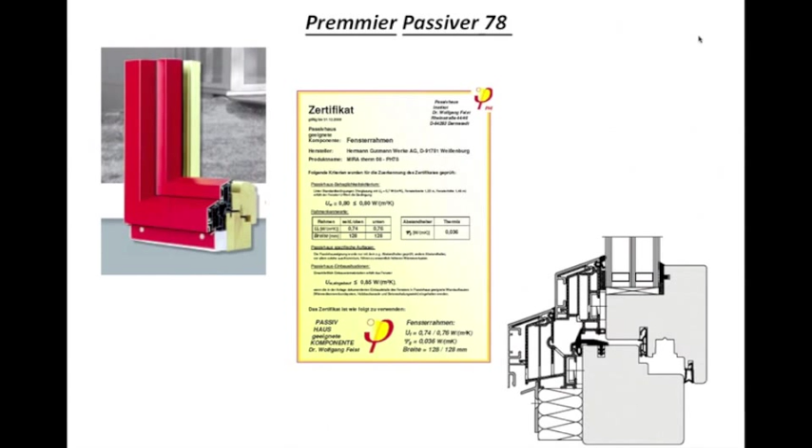Without further ado, I'm pleased to introduce Katrin Klingenberg and her presentation on climate-specific passive house building standards for the context of the North American climate zones. Okay, Katrin, take it away.

Okay, very cool. Let's quickly do a sound check. Can you guys hear me all right? I guess there's no feedback, right? You can type in a message, it should be okay. So if people have a problem hearing me, just type in a message and say it's really bad, speak louder, or something to that effect.

This is a typical building, not very well insulated. The surface temperatures are not anywhere close to equalized. We have radiant losses to the windows, and so on. You're familiar with this. Our goal in a passive house is to basically balance out the internal heat gains with the losses in that particular climate, and from there follow insulation levels specific to that climate.

A couple of years ago, we came across for the first time a provision in the International Energy Conservation Code that made us a little bit astonished, actually. There was a provision that said if you're meeting the peak load of 1 watt per square foot, you don't have to comply with the other requirements of the International Energy Conservation Code. Of course, the inspectors immediately threw it out and said, 'I have no idea why this is in there, you still have to do it,' because nobody could remember where this provision came from.

We started doing some research and found out something very astonishing: this provision has actually been in there since 1975. It was in the very first international code, at that time called the Model Energy Code, as an answer to the oil embargo. Since then, this provision has remained, and that was really amazing.

So at that point, they already understood that if you can build a shell that retards energy loss so much that you can almost heat your house by internal heat gains—meaning light bulbs, people, appliances, or solar—you almost have a balanced home, and you need only very little energy input to keep that building comfortable. Essentially, that's the reasoning why it's still in the International Energy Conservation Code.

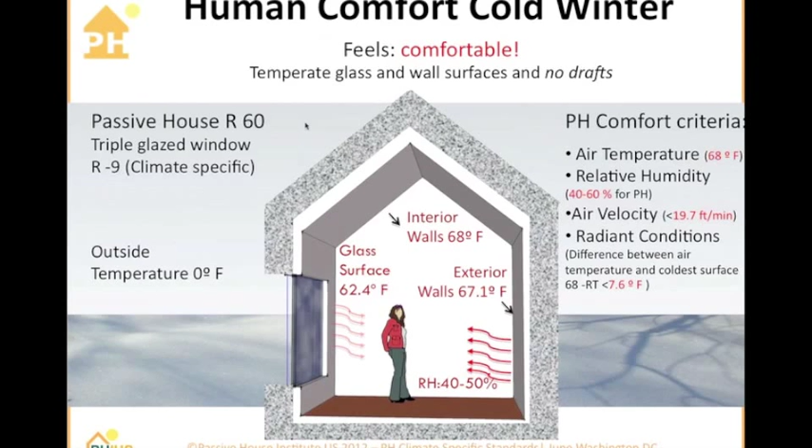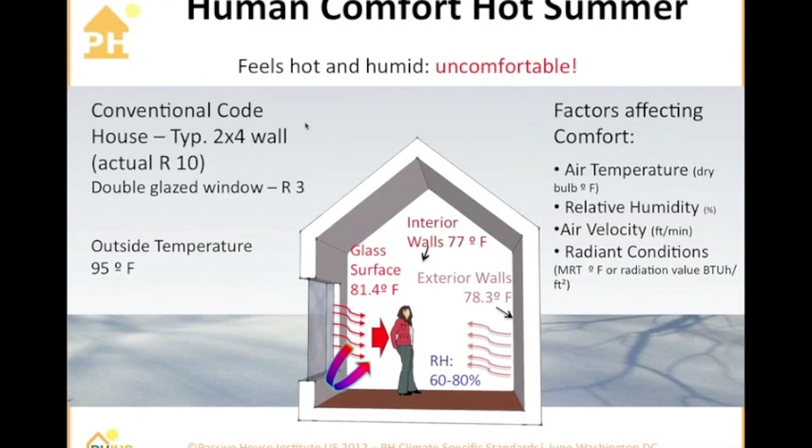So the same principle, of course, in the United States we have to concern ourselves with cooling very quickly. At that point, we have to transfer that same principle of equal in, equal out to the cooling case, which here again in a conventional code home, you can see the surface temperatures are higher, the glazing is radiating heat, and it doesn't take as much R, because we don't have as high a delta T as in a very cold climate.

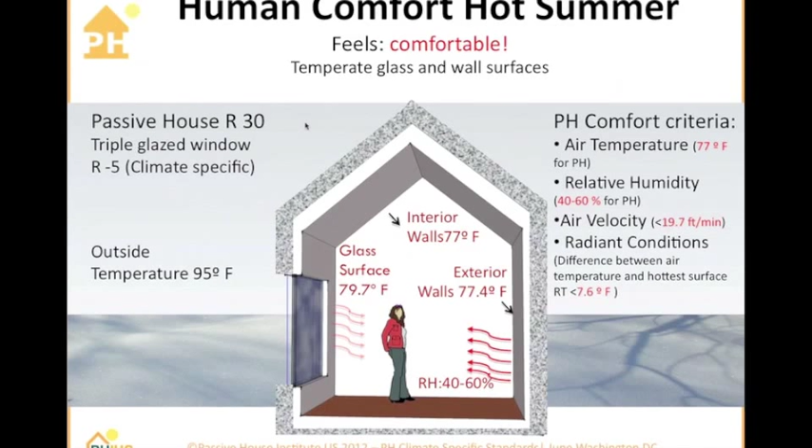So in a cooling climate, we're expecting that insulation is much less of a silver bullet, and there will be very different design criteria that help keep energy down. But essentially here it's the same idea: we're maintaining an interior set point, we're maintaining interior relative humidity. So again, back to this idea, equal in, equal out—we have a stable interior, and through the retardation measures of the envelope, we're maintaining this climate on the inside.

Okay, so from there, very quickly to the current metrics and how this peak load criteria actually plays out in those metrics right now.

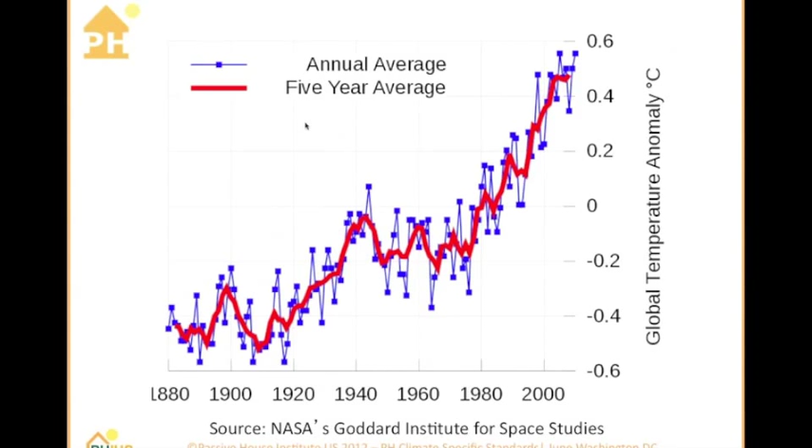Quickly, just thinking back to why those metrics came about, back to the 1992 Rio de Janeiro Earth Summit, the factor 10 reduction request by the scientists back then, global warming, CO2 emissions, you're all familiar with that. This slide right here is still stuck at 0.6. The current temperature is roughly 1 degree Celsius rise in temperature of the planet.

So we really need to get to work and stop those CO2 emissions to have a chance to stabilize this increase of temperature. And some real passive pioneers like Douglas Balcomb right here, he was one of the very first scientists that was starting to work on energy conservation after the oil embargo. He was working at the time at Los Alamos. He was one of the very first ones who tried to come up with something similar to what Passive House is doing now, some kind of design concept to try to manage the complexities of passive, of energy conservation, solar, and a very small auxiliary heating system.

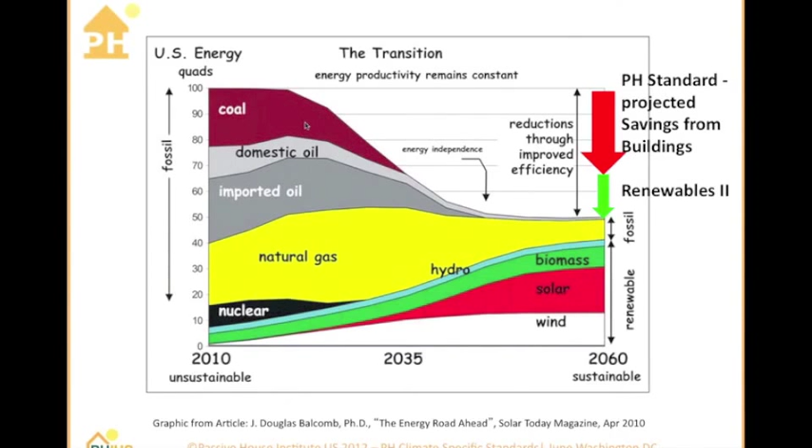He draws a very different map right here than the International Energy Agency still in 2006 proposed, that most of our energy will come from coal and oil and gas and so on and so forth. He very early on already said that most of our energy increase needs to be covered by efficiency and by renewables. And here you go, this is really the ideal of our energy society or economy, how it should develop.

Okay. Ah, okay, sounds good. Where was I? It doesn't matter, just click on that field, it'll come back.

All right, so quickly back to, you all know these slides, the factor 10 reduction. Yes, of course, we are totally behind this. That is where we need to be in our energy conservation efforts. So we're not questioning that at all. That's definitely a really good target where on average we should arrive at.

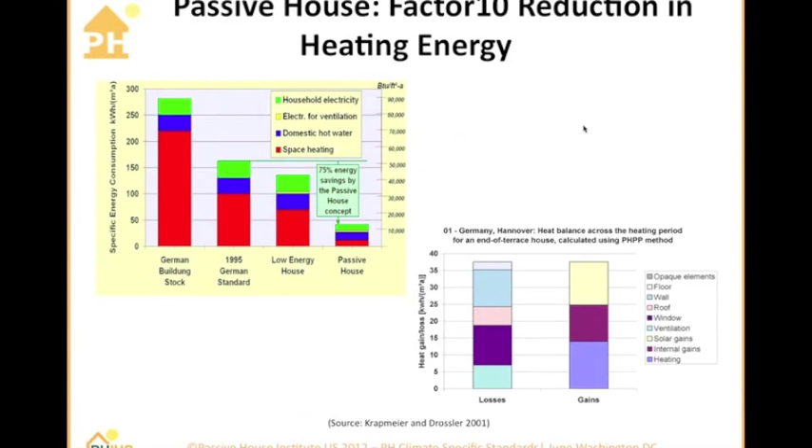And that target is entirely possible in climate zones that are very similar to the European heating-dominated climate. So here's the PHIUS Plus certified Black Beaulieu home in Salem, Oregon, and I'm showing you this right here because for this one we have pretty good monitoring data. And here in this slide, you can see that even in a little bit milder climate of Oregon, we are achieving, compared to a code home from 2008, still about a 66% reduction.

And the match of PHPP with that actual consumption was pretty good, except one thing you might notice right here, that the heating is almost non-existent. And that was already a little bit of a question mark that was raised. That is not how PHPP calculated it. PHPP still calculated a pretty large heating demand on an annual basis.

So what happened here? Well, it turns out what we see in pretty much all passive houses nationwide where we get monitored data from these days, the internal heat gains, people's Xboxes and servers, they are pretty much one-to-one replacements of the kilowatt hours that we otherwise would need for heating. And that might lead to a conclusion that in a culture where we have a lot of internal heat gains, maybe we are over insulating our houses by going to these levels.

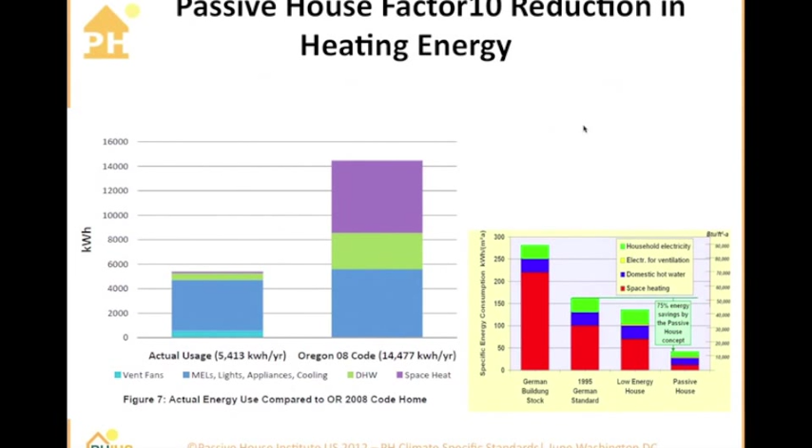Because in this case, in Salem, Oregon, this also had an unintended consequence. In a climate where there should be no cooling load, all of a sudden they caused a cooling load in the summer, which of course also increased the energy consumption. So the projected energy consumption in PHPP was actually a little lower than it turned out in the end.

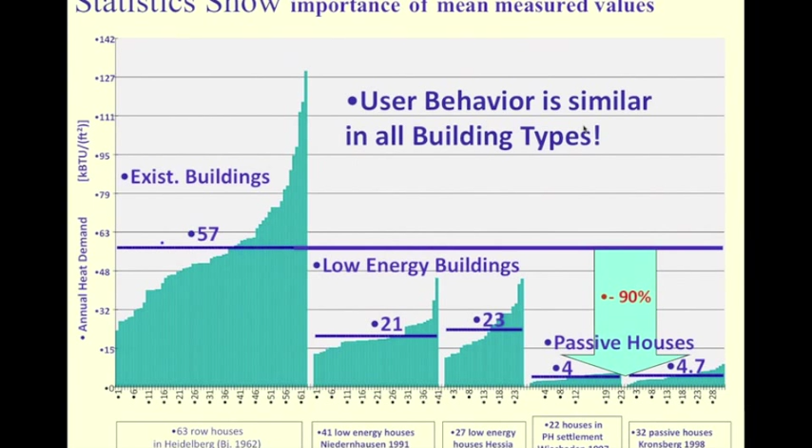And you all remember that slide, of course. This is just the total confirmation that in general, the target with the factor 10 reduction is absolutely right on. If we can get there on average and now transfer that to the United States, allow those in the north maybe a little bit more and tighten it a little bit more in the south, if we still arrive at an energy reduction of roughly a factor 10 or hopefully even a little bit more, then we have achieved our objective from a climate perspective.

Okay, quickly, these are our current certification criteria that we're going by. You all know those. You have probably seen the suggestion from Marc Rosenbaum, and I absolutely and totally agree with him that the annual total primary energy demand, we definitely will have to zoom in our studies on that one a little bit more, because currently the certification is based on the European primary energy factor, which in the newer version even got lowered.

So we are roughly at 3.3 as a factor in the United States on average. And right now, projects being certified using the new PHPP are using 2.6. So that's a little bit, I guess, not very honest with ourselves. And the PHIUS Tech Committee has started the discussion, like, shouldn't we certify based on the actual primary conversion factor

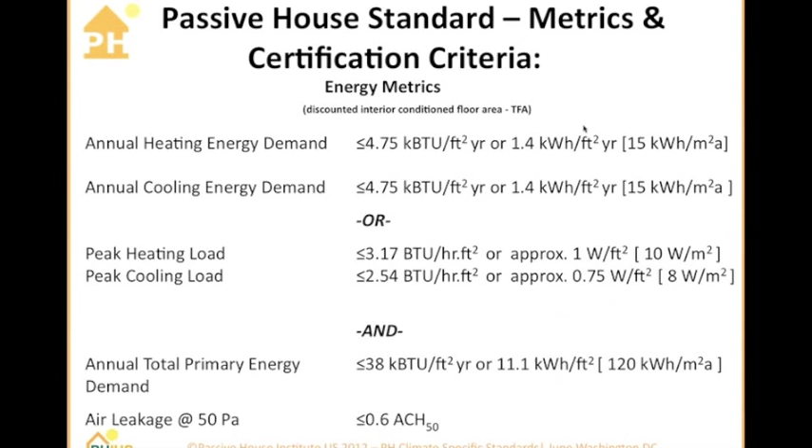that is the average in the United States? Okay, so one little tweak right here, this slide actually, you've probably seen this before too if you've gone through the training. It points to another problem, and that is that currently the certification is based on a treated floor area that does not really match with any of the other modeling tools in the United States or other rating systems, for example the treated floor area that RESNET is going by. And that causes a lot of confusion. People don't really understand that difference. And the treated floor area as used in PHPP is based on German tax law. It really has nothing to do with thermal transfer.

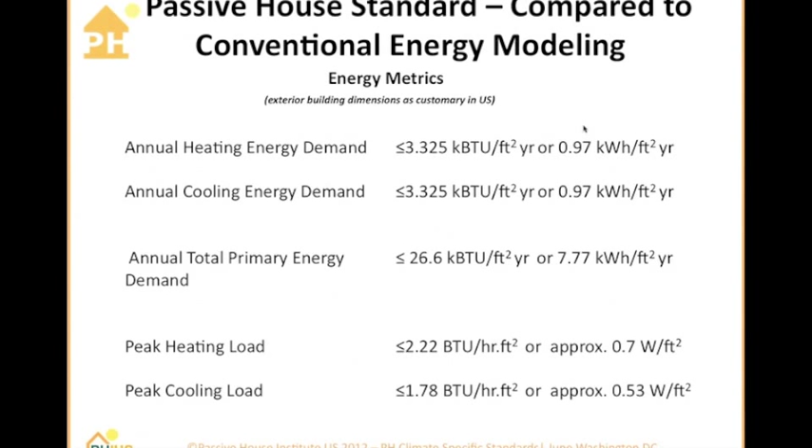So if one really wanted to customize for North America, for the systems in North America, one might have to think about whether we should use a typically used treated floor area, or conditioned floor area, to avoid this confusion. This is, by the way, something similar that Minergie is doing in Switzerland. That's what they did. They adopted the treated floor area or conditioned floor area that was typically used in their customary modeling tools.

Another, you remember this slide right here. Again, this is just to make the case that conservation really is the cheapest way to abate CO2, and that is really our main goal with a standard that we hope to tighten on average by being more granular in our definition for the various climate zones.

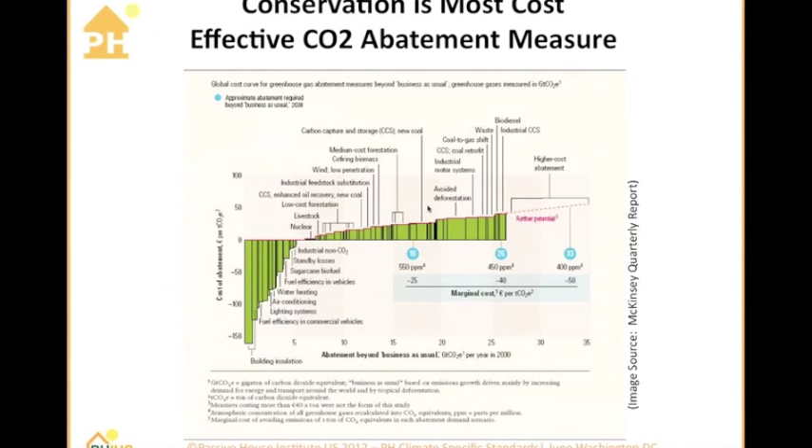You remember this slide, I'm sure, and I like to point out that this indeed is very specific to Germany. There was something very interesting happening at this international conference in Hanover when I was there, and that was Dr. Feist presenting the same curve, pretty much adapted for different climates. And yes, you guessed right. In his curve, even Mexico City showed a drop at 15 in terms of the savings that come from the heating system, which really is very unlikely in a country that is already using the delivery of space conditioning through the supply air. So there are a lot of boundary conditions for different climates that need to get reevaluated and really scientifically underpinned.

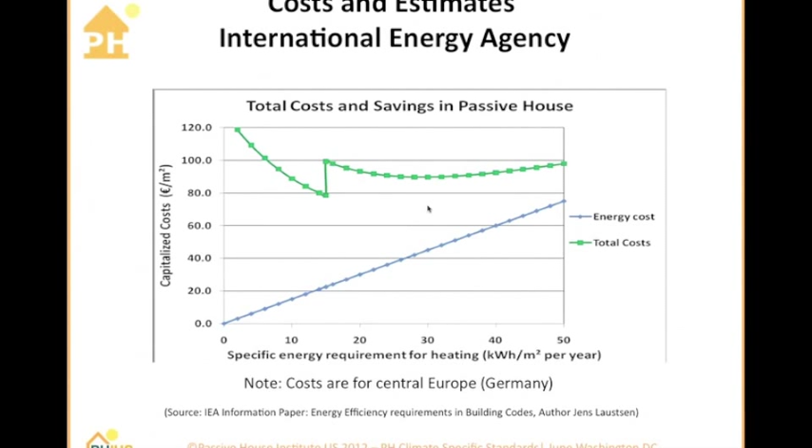We need to make sure that we have the right data and show that this philosophy of passive house, combining conservation with the most cost-effective way to do so, is actually true in the particular climate zone with the particular factors that we can use to lower our overall energy consumption. And you remember this one: in other climates, this curve might not look like this. So this is part of this whole idea that we might want to look at different models for this cost effectiveness that other organizations are actually working on. And we need to give this some thought and see what is up with those.

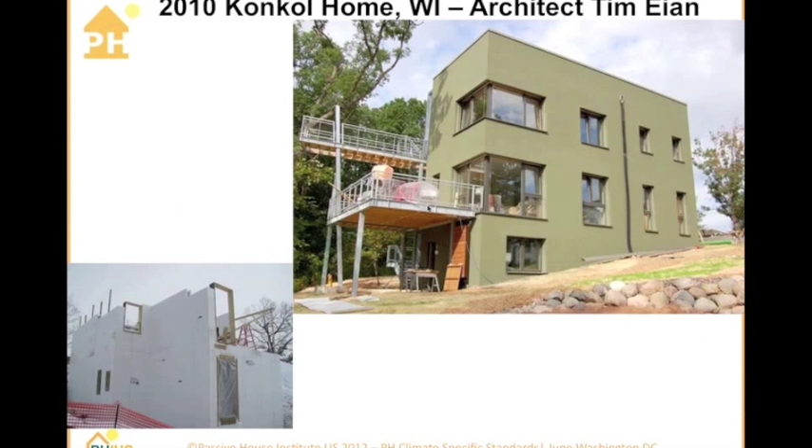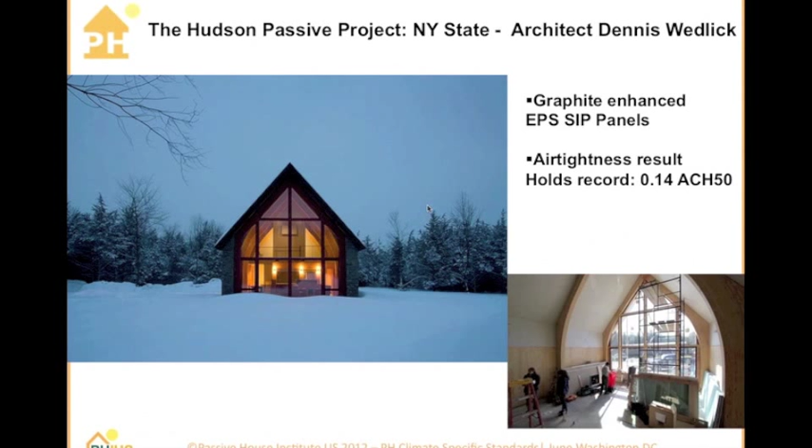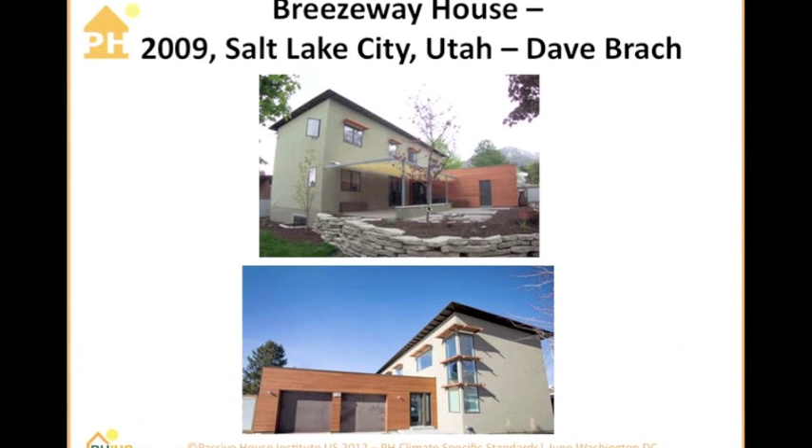Okay, quickly, some climate-specific implications. This is really where it gets interesting. You remember all these, I'm going to flip through those very quickly. This is really just to remind ourselves that by now, as a community, we really have made great strides, and we have seen passive houses built in all different climate zones. And I'm not showing each climate zone right here because there are just way too many. But we have arrived at a point where we have these examples and we can study them.

Louisiana, that one was a very difficult project. We learned the lessons of dehumidification, and we have a pretty good idea how much that actually impacts our load distribution now. This is a huge issue we will have to deal with.

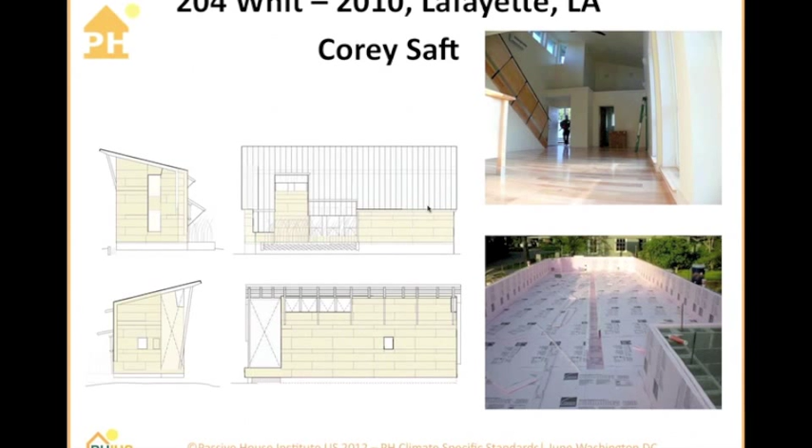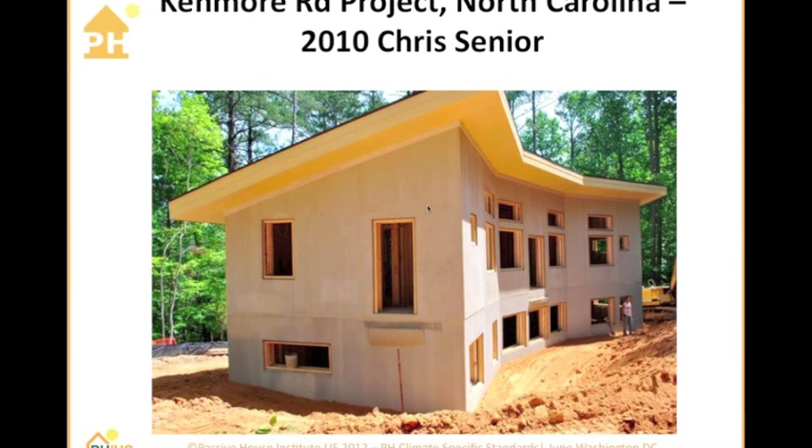We have North Carolina, where the builder here is choosing a concrete prefabricated panel. We have issues to deal with, like hurricanes, where we have to build passive houses that withstand certain disasters. So all kinds of these things have been tackled, and I think we have all successfully shown that it is possible and that we can do this.

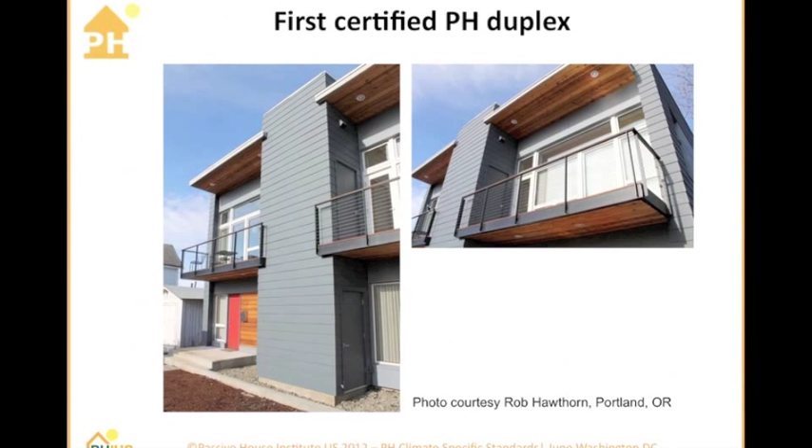Duplexes now. Rob Hawthorn in Portland is already onto his second duplex. This was the one he just finished and that is being currently monitored. All fantastic projects, and of course with the duplexes we have already launched into multifamily.

There are a lot of other really great multifamily projects in the works. Tim McDonald in Philly, the housing network, is working on 7 multifamily projects in 7 different climate zones. These are affordable projects. So there's a lot of exciting stuff that is probably going to go in the ground by the end of the summer. We're going to see all this happening.

Of course, Adam Cohen is pushing the discussion forward on the commercial projects. This is the CEED project here that he first finished. And this one actually beat the predictions by 6% for the first year in operation. And now he's currently working on a dentist office, as well as his first dormitory in the United States, which is currently under construction.

It's coming out of the modular factory. It's a 100-unit dormitory project in Virginia. So all kinds of really, really exciting things that we're seeing, and here, like the CEED mechanical room, all that is transferable.

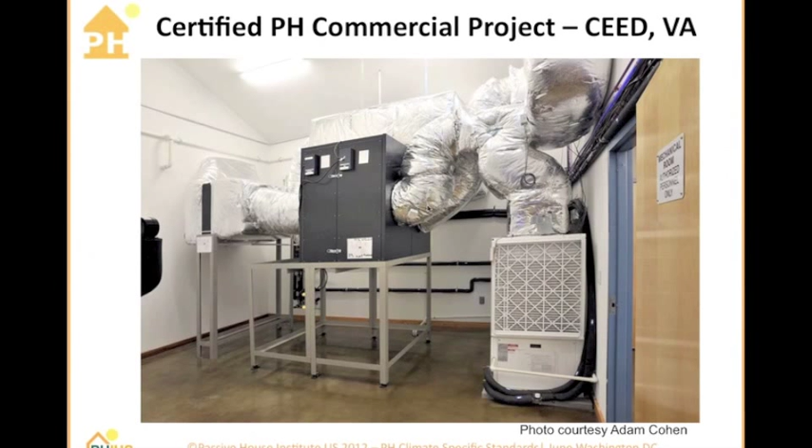Of course, we still need more products and components. Back to the climate specific standard discussion. So we used to say, well, the European climate is similar to around the edge of zone 5 and zone 4.

But of course, that is not entirely true, because the right two-thirds of the United States are very humid, and that causes a very different condition. And also zone 7 and 6, and even the top half of 5, are very, very cold. So Central Europe is not necessarily there either, though the Scandinavian countries are getting much closer to that level.

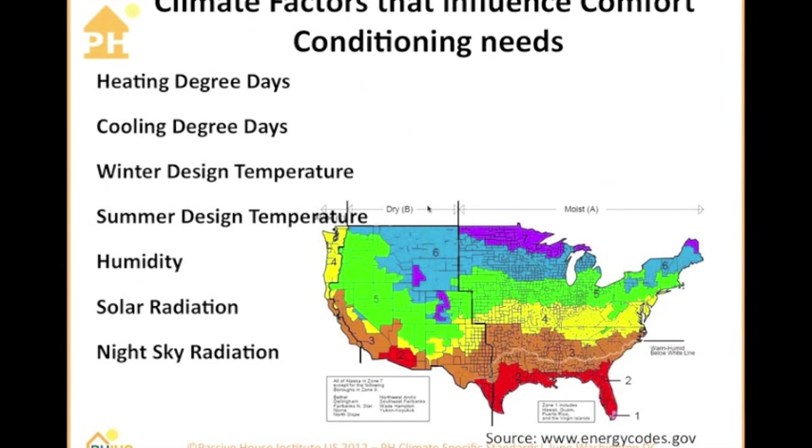They did a study worldwide for China, Europe, and the United States, and they were trying to prove the potential of passive house standards worldwide as effective for CO2 abatement, and that we really need to do it, and that internationally we need to go there. They are currently working on some kind of a democratic worldwide passive house strategy.

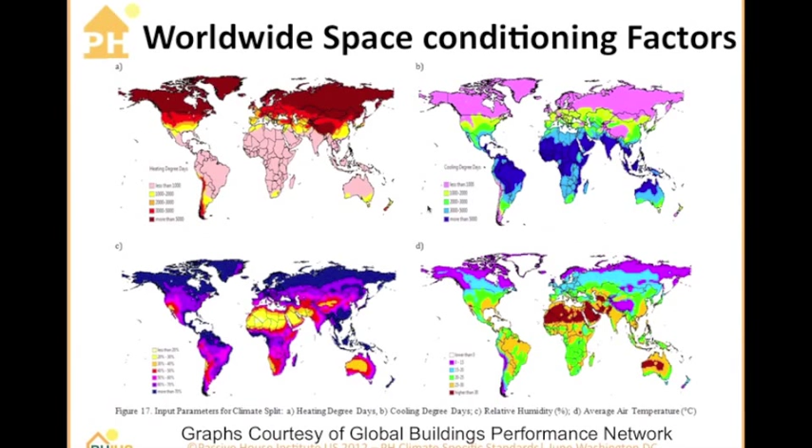And then, of course, you will be asking that question yourself: what happens if we overlay all those? This happens.

This is the actual map that made me really excited when I first saw it. Finally, we have a really good idea how drastically different the space conditioning needs in the United States really are. And if you look at this map, it looks more like China than anything else.

The gray in Central Europe is just a little tiny stretch on the bottom between 4 and 5. Everything else is either colder, warmer, cooling, and dehumidification.

So we have a huge challenge here, because the combination between cooling, heating, and dehumidification is not only important for the mechanical optimization of the system, but also requires different rules and solutions for optimizing these different loads against each other. If we're using heating as our main criteria, or cooling, or dehumidification as our main criteria, we might inadvertently make the other one worse.

So we need to come up with a strategy that allows us to optimize all those space conditioning needs with each other to achieve the most optimal solution.

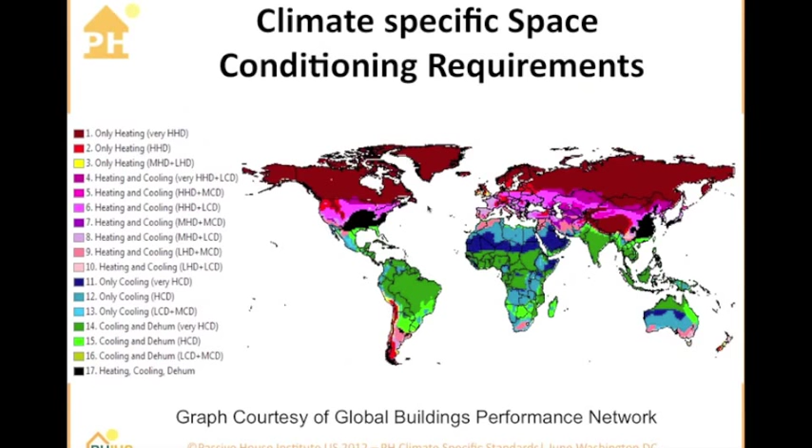I think this map is going to be a really great beginning for us to start analyzing which systems are the best for what particular climate zone. So I'm very excited about having this.

That leads me to the next slide, which has been created by Ty Newell from Build Equinox. He's about ready to launch his CERV, which he introduced to the Passive House community in Duluth during the second Passive House conference. They are finishing up the UL listing.

I'm going to retrofit my house with this new mechanical ventilation system, which does heating, cooling, ventilation, all heat pump based. I really want to see from my perspective how this is going to work, and I'll report on how this is actually working for the Passive House shell.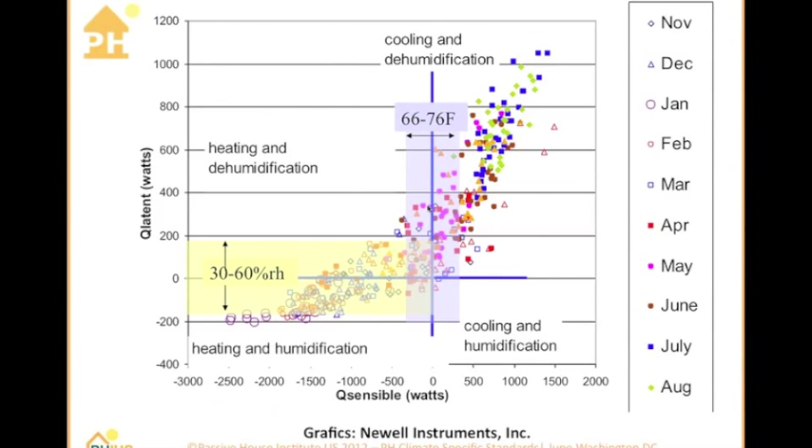And those zones are pretty narrow, so this is a challenge, and that goes back to what are our design strategies for the envelope to allow our mechanical system to operate within this operational range.

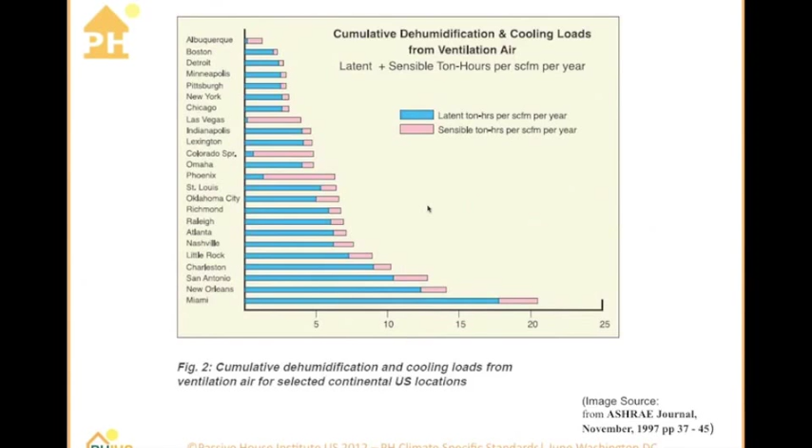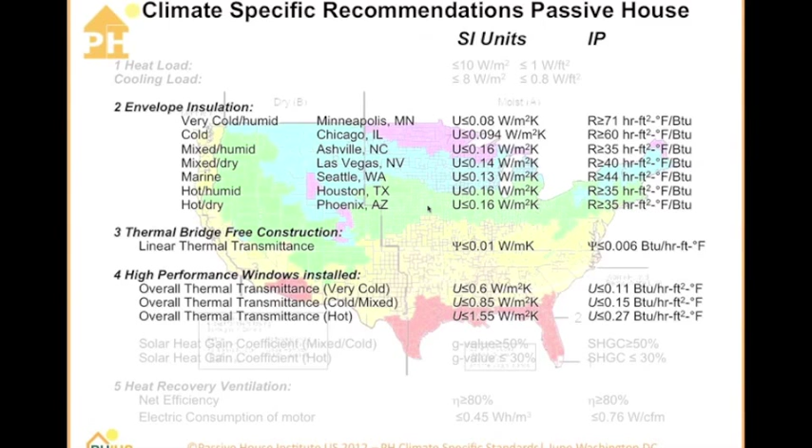These slides show the consequences for the different climate zones. We have different R values, different requirements for our windows, and the same thing is true for our ventilation systems. We have ranges for the ventilation system here as well that we need to zoom in on.

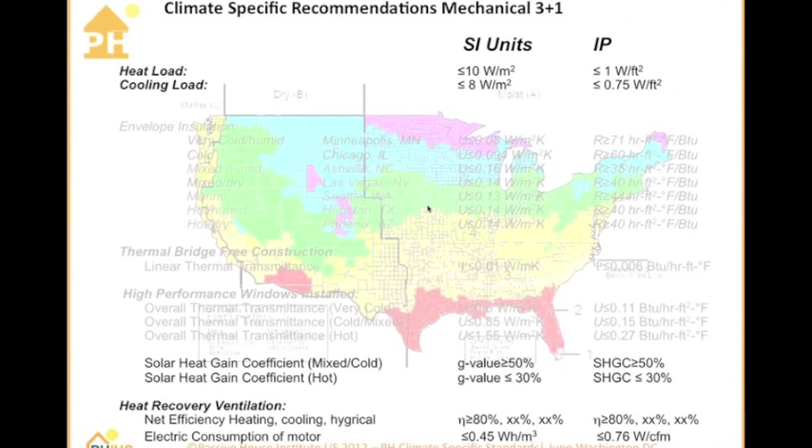That whole ventilation system thing—I just recently learned that the new certification criteria from the PHI are making people subtract 18% for non-certified units. That is really starting to be completely unworkable, and we will have to really investigate what the truth is and how those North American units are actually coming in terms of performance. PHIUS will tackle that as well, the tech committee, parallel to the whole standards discussion.

So BEopt here from the National Laboratory, from NREL, it's a different approach. Here we can see that this dramatic dip does not occur. It's more like a flat curve with a little bit of an optimum in the middle. But then really it doesn't matter if you go a little bit right or a little bit left—you have a range, a spectrum to choose from where your cost effectiveness is okay.

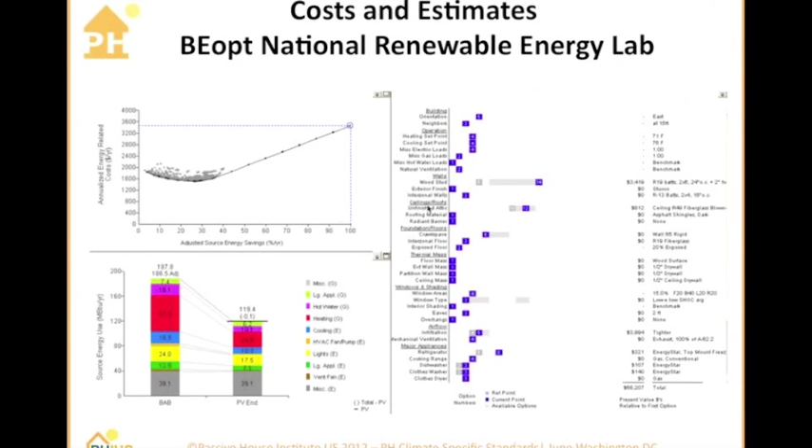And as we all know, cost fluctuates. So the designer will be able to choose right or left of this optimum and still be fine from a cost perspective.

Now, this is a slide from a fantastic master's thesis. Bruce Kruger undertook the first investigation in regards to climate-specific PH standards, and he found some interesting things. He ran all projects through PHPP, one project through PHPP, through Energy Plus, through BEopt, and he did that for 20 cities. And then he compared the results.

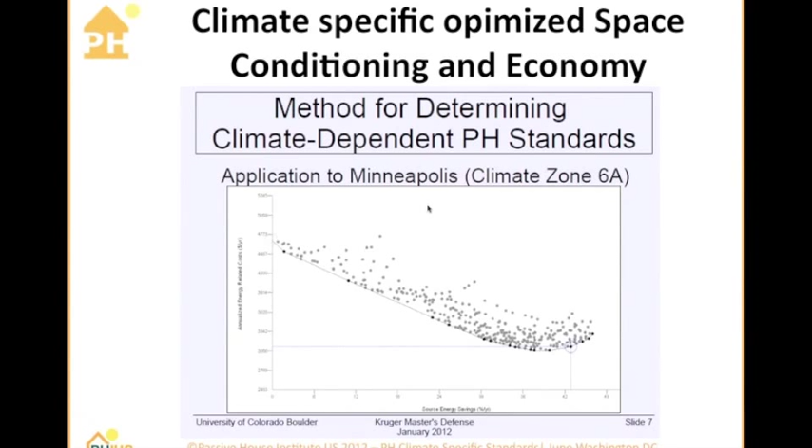The interesting thing he found was that this cost optimization curve for cold climates is rather flat. You have a lot of options right or left of it, and you can choose your level of final energy savings. In a climate like Phoenix, a very extreme cooling climate, that cost optimum is different. The curve goes up very quickly. At a certain point, there's really no point in investing in efficiency. The cost just skyrockets there.

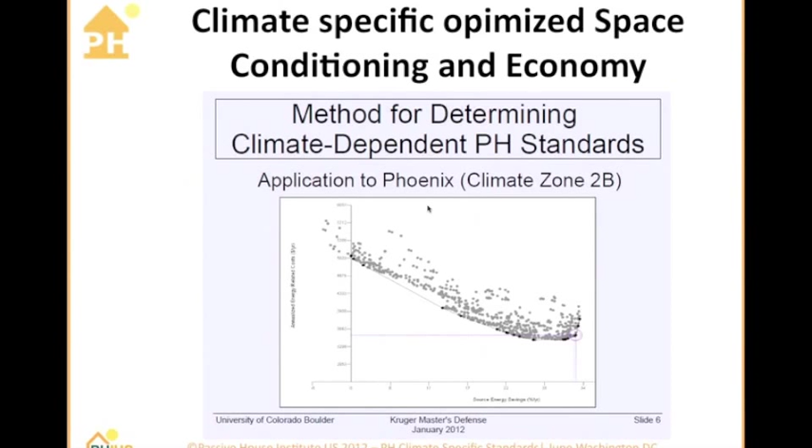So there are some different characteristics that we see in different climates, and that will definitely be taken into consideration when investigating what level of energy savings should be achieved in what climate.

So Bruce came to a very interesting conclusion. He said, well, we really need to optimize heating and cooling demand against each other. We can't just look at one or the other independently. And I would like to see another column for dehumidification as well. And then from his optimization, he concluded a total space conditioning demand as a certification criteria.

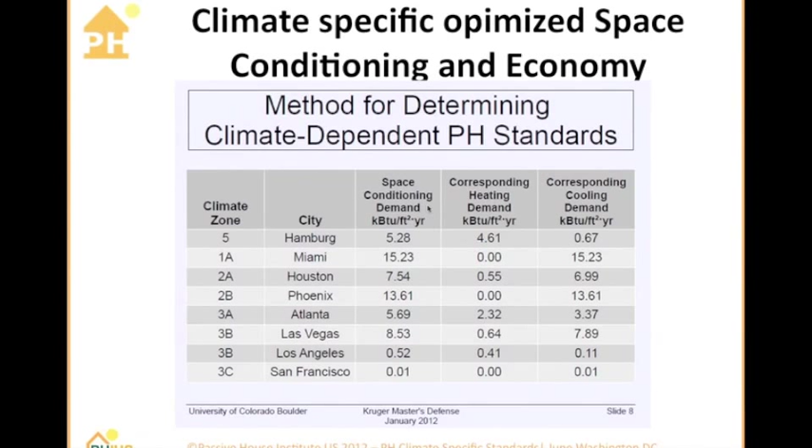It's really interesting. Let me see if I can go back here for a second. I don't have Chicago. In Chicago something interesting happened. We always thought that Chicago was already fairly difficult to get and to meet the standard. But it turns out if you take the approach of optimizing both space conditioning needs together, Bruce came to the conclusion that actually the Chicago values could be tightened against all expectations.

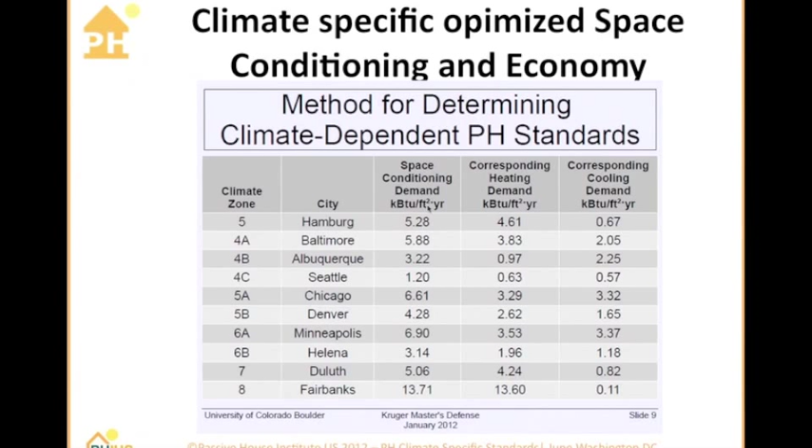So this is all really interesting stuff and deserves a closer look from the tech committee to see what exactly happened here and if this is a take that we can follow.

Yeah, so that's essentially our plan. I'm not saying one way or the other right at the moment. The tech committee will take on this challenge and will recruit volunteers to discuss this and bring people into the discussion, and then through the public comment period, hopefully come up with a proposal that we can agree upon.

And then once we do that and we can agree on some climate-specific standards, obviously we'll roll this into the PHIUS Plus certification. We very strongly believe that QA/QC in the United States, especially with the added challenges of hygrothermal performance of the wall assembly in the very humid areas, is very, very critical.

We will fold it in. We are not really sure yet if this is going to be in terms of versions of standards, because we expect the standard to develop. We are just at the beginning. Technologies are developing, new technologies, and they all will have an impact back on what we think or might think right now is the most efficient way to design these structures. But certainly new technologies might shed a totally different light in just a few years.

And of course, we will continue to train consultants to be able to guide that design process safely for the people who are embarking on passive house, to assure the most quality assured projects that hopefully then also perform for many, many years to come as we had designed and envisioned them.